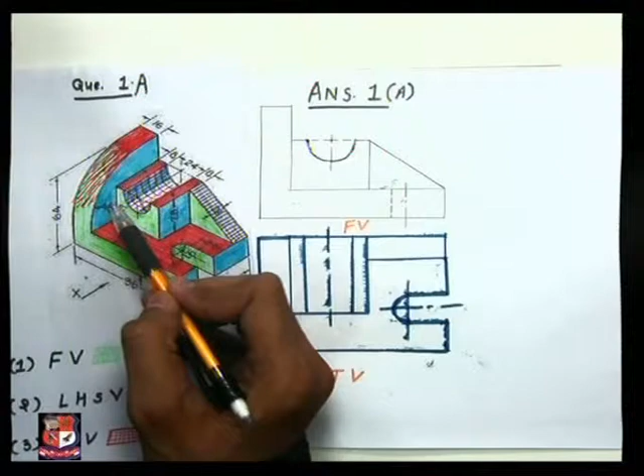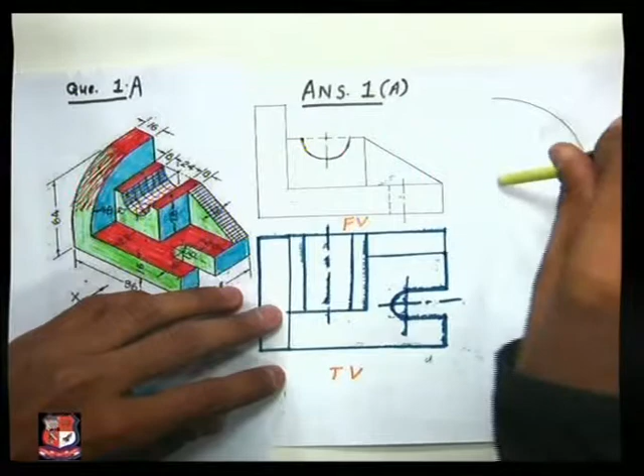Millimeter. So on the compass, put a radius of 48 millimeter like this, measure this 48 like this, and from here draw an arc of that radius. So it would appear like this. This is an arc of 48 millimeter distance like this, and these edges, this vertical edge, are fully visible. So draw those edges with the full line like this,

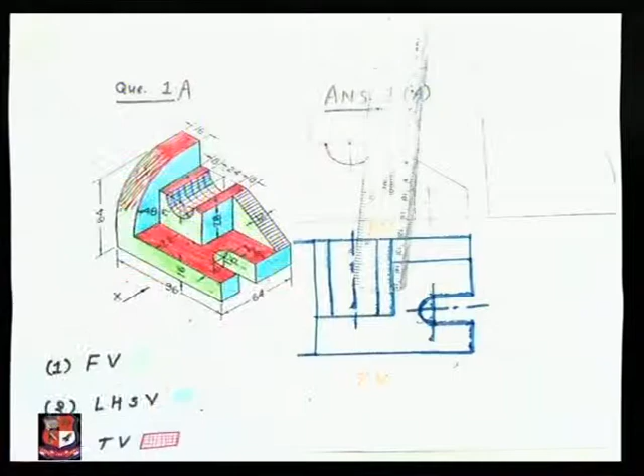and this is the bottom face of an object like this, and here it will be a straight line in left hand side view. Here also a straight line would be there. So this is the outline of its left hand side view. If you look from the left side, its outline would appear like this.

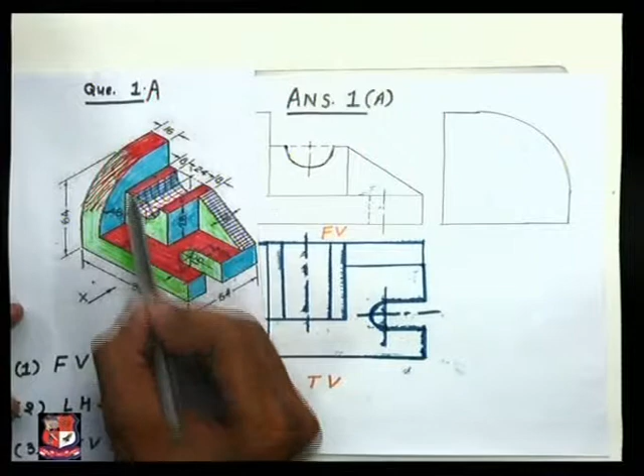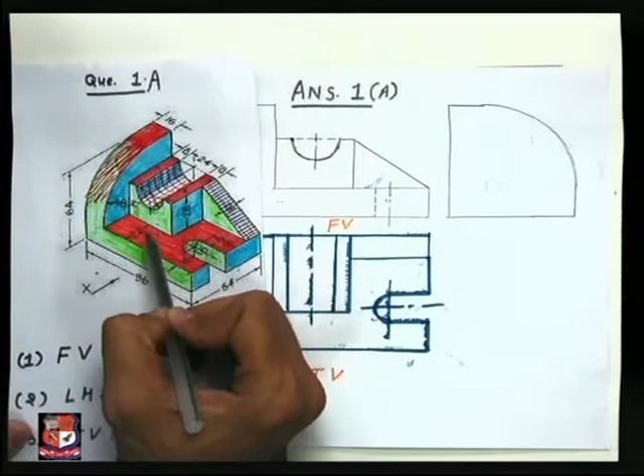Now these edges, this edge, this edge, this edge and this edge, all edges will not be visible in the left hand side view. Hence we have to draw all these edges with dotted line only, because they're not visible. So for that, let me start from here. This edge starts from here, ends up to here, and the total length is known to us, that is 64 minus 22. So draw a straight line from here, and of course it's a dotted line. So join them with a dotted line like this, because that edge is not visible in left hand side view

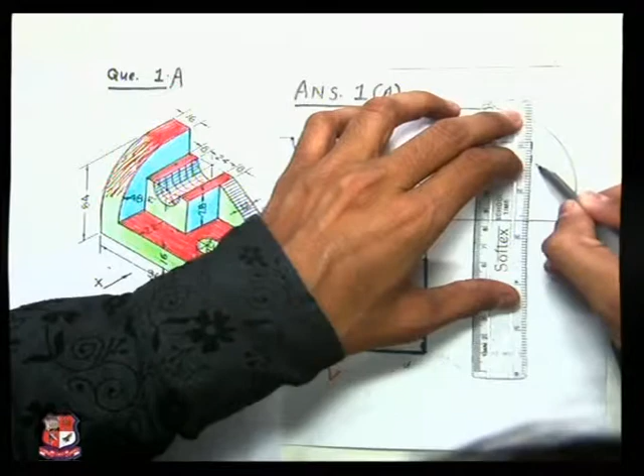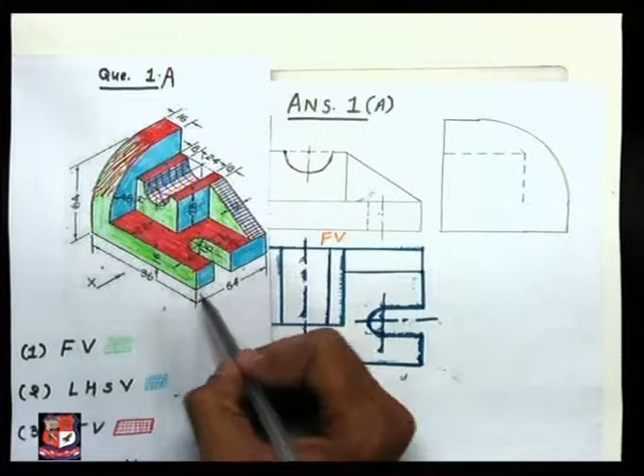up to here, and from here to here height is 28 millimeter. So draw up to 28 millimeter height with the dotted line like this. It's a dotted line. Now in left hand side view, this edge will also not be visible. This blue colored edge will be visible in the right hand side view, but in left hand side view it would not appear. So draw this rectangle with dotted line, and height is 16 millimeter. So this height would be 16 millimeter, and join with the dotted line like this. So this rectangle is drawn.

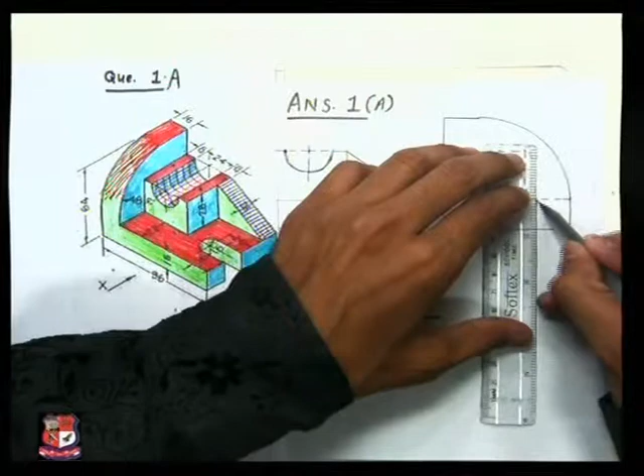Now think about this rectangle, these two edges. We know this distance is 16, this distance is 16. So from this end at a distance of 16 millimeter, draw a dotted line, and here again at a distance of 16 millimeter, draw another dotted line. So this is the side view. Now this strip is still not visible in the side view, but it is there. So we have to represent this strip with dotted line.

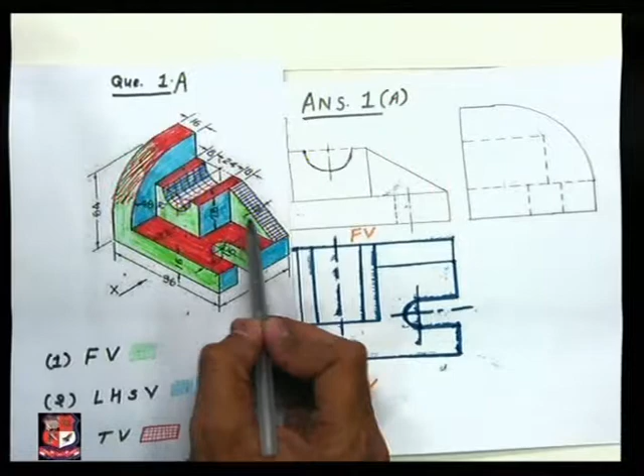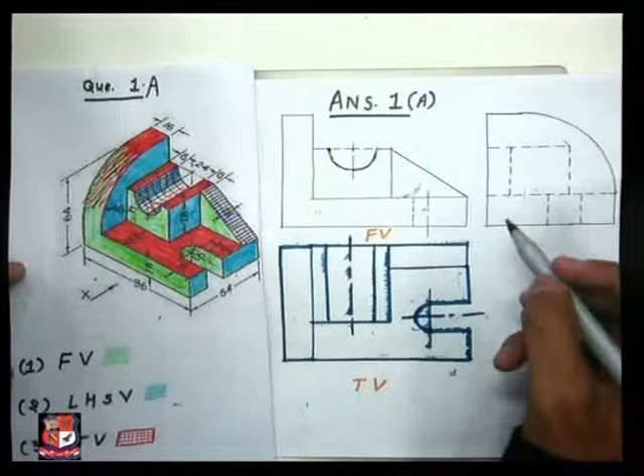Width of this strip is 12 millimeter. So from here at a distance of 12 millimeter, draw a dotted line like this, which starts from this edge and ends at this edge, because the strip starts from here and ends here. So this dotted line represents this strip of 12 millimeter width. So again, this is left hand side view. You can write here the name of the view, left hand side view, like this.

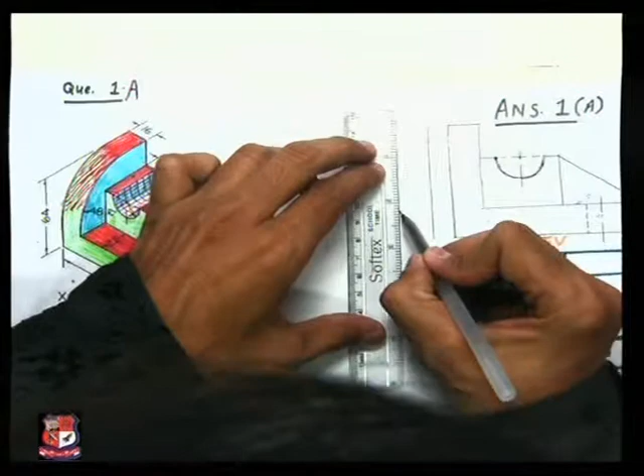Now the third view that we have to draw is the rear view. If you look from the rear side, the rear view would be exactly opposite to its front view. It would be the mirror image of the front view. So just draw the mirror image of this front view which we have drawn over here. It would appear like this. But in this case, some of the lines may be visible and some may not be visible. Lines which are visible here may not be visible in rear view, so they should be drawn with the dotted line. It depends upon the shape of the object.

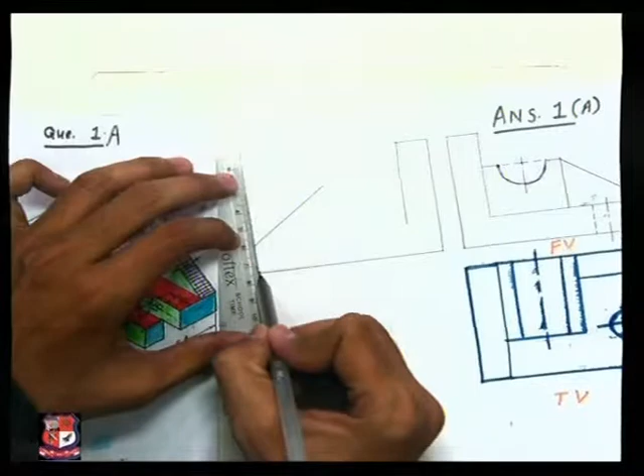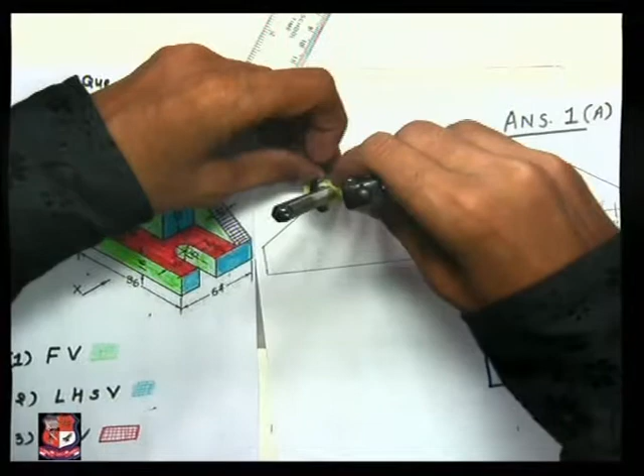Up till now, the outline would be alike in both cases, in front view and in rear view. It would appear like this. And here an arc is there, an arc with radius 12 millimeter or diameter 24 millimeter. Draw the arc with the help of the compass like this. So this arc would be visible like this.

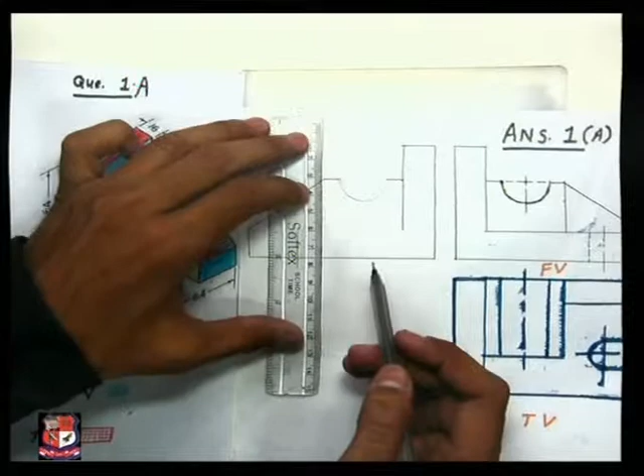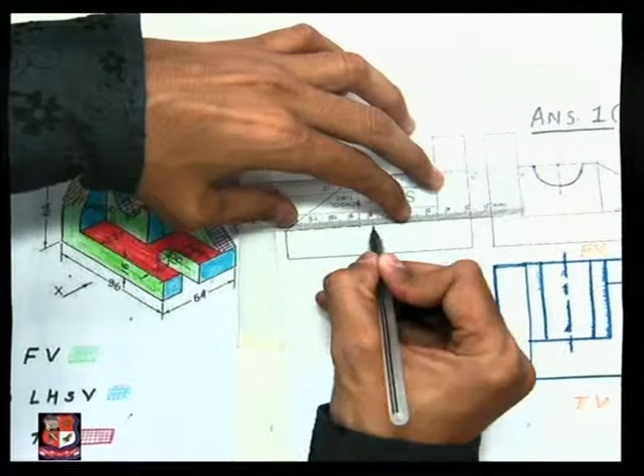Now think about this edge. This edge is there. It is not visible in rear view, so it should be represented by dotted lines like this. So you can see here in front view this edge is visible, but in the rear view this edge is not visible. Similarly, if you look from the rear side, this edge will also not be visible. Hence this line should also be drawn with dotted lines like this, because that edge is not visible in rear view.

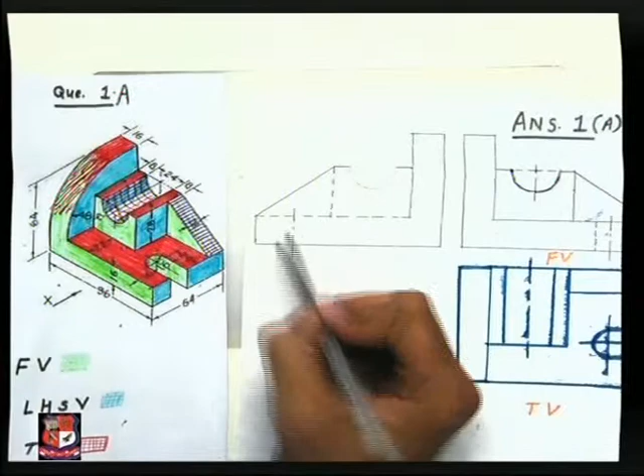Now think about this box, this edge and this center line. We know this center line is at a distance of 20 millimeter from here, so at a distance of 20 millimeter from this edge draw a center line, and from that center line at a distance of 8 millimeter draw dotted lines like this. So this view is the rear view of the given object.

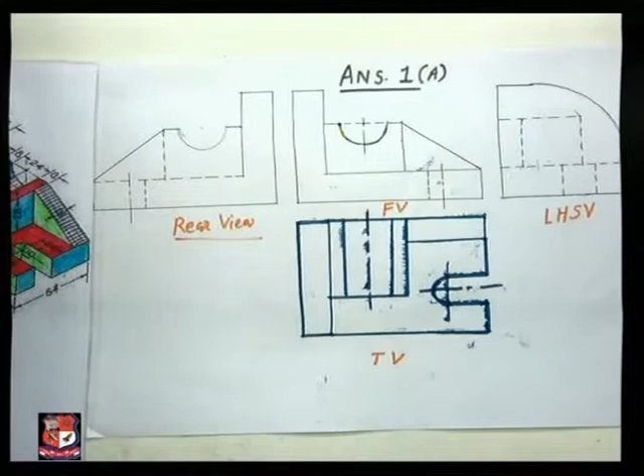And in the examination you have to insert the dimensions of all of this object. It should be drawn like this, as shown over here. This is drawn with better clarity.

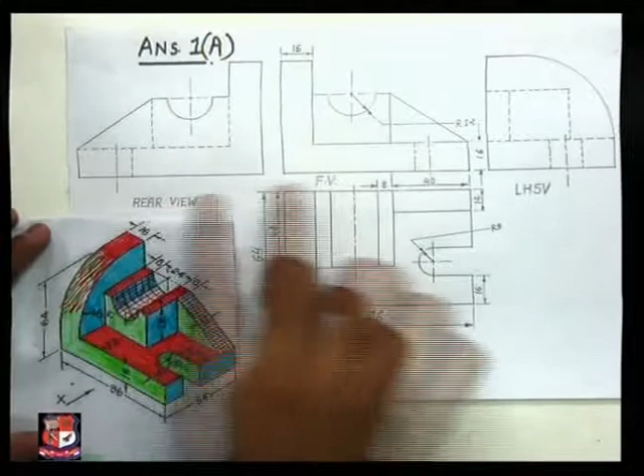This is an object, you can see here, this is an object, and for this object various views are there: rear view, front view, left hand side view and top view. This is the solution of this question. Here also you can see these are the views which are asked in the examination.

Answer number 1A, you should write like this with big letters, answer 1A, because students forget to write this. Front view as we have drawn, this is top view, left hand side view and rear view. Insert the necessary dimensions like this. This is 16 millimeter, this is radius 12, this arc is there, so the arc should be denoted by the radius parameter,

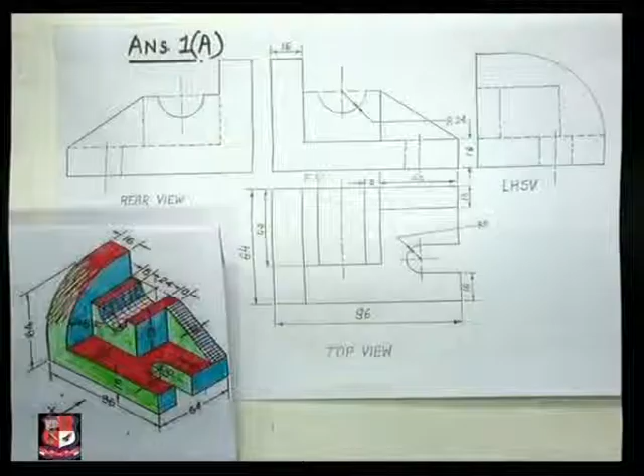not diameter. In the given diagram or in the given isometric view, here diameter is given, 24 is given, but in our case here we should write radius. We should not write this diameter 24, we should write like this, arrow and radius 12 millimeter, then 16 millimeter. Here also R8 is written, means radius is 8 millimeter.

We should not insert like this, from this edge to this edge distance is 16 millimeter. That should not be written in the drawing. That is against the actual law of drawing the objects. In left hand side view these are the dotted lines. In dotted lines also you should take care like this.

Whenever the dotted line turns like this, here a dot should not be there. This line should be joined. Here the end point should be joined with two dots like this. And here also a T mark should be there. Here also T should be there. So this is the dimension and solution of question number 1A, which is asked for 8 marks.

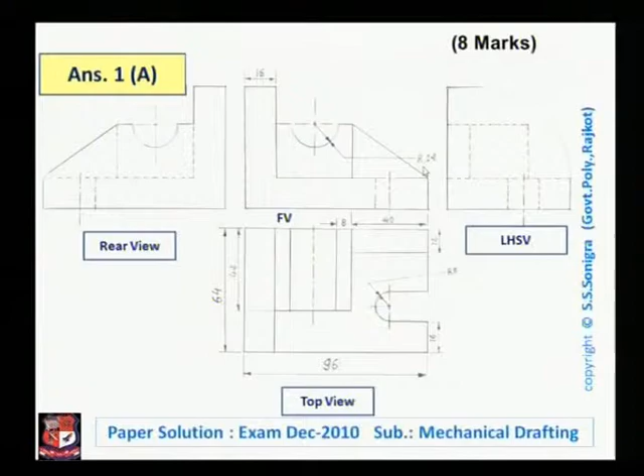Now we continue with question number 1B, which is asked for 5 marks. A square pyramid, base side 30 millimeter and axis 80 millimeter long, is lying on HP such that its base sides are equally inclined to vertical plane and one of its slant edges is perpendicular to horizontal plane. Draw its projections.

So here a square pyramid is given to us. As we know, in case of a square pyramid, its top view would be a square and its front view would be a triangle. And here it is given that its base sides are equally inclined to vertical plane. It means that its top view would be a square in such a way that all 4 edges or all 4 sides of the square make an equal angle, that is 45 degree, with XY line.

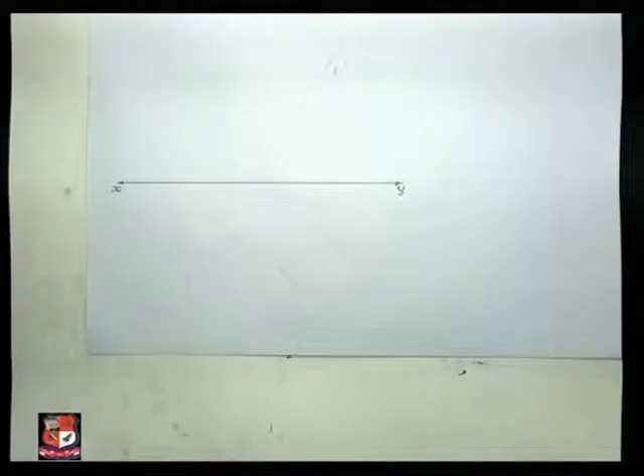So we have to draw its top view in such a way that the square makes an angle of 45 degree with XY line, and its front view would be a triangle with height 80 millimeter. So let me draw that object. It would appear like this. First draw an XY line as shown over here. After drawing this XY line, draw a square having side length 30 millimeter and all sides make equal angle with vertical plane, hence that angle is 45 degree.

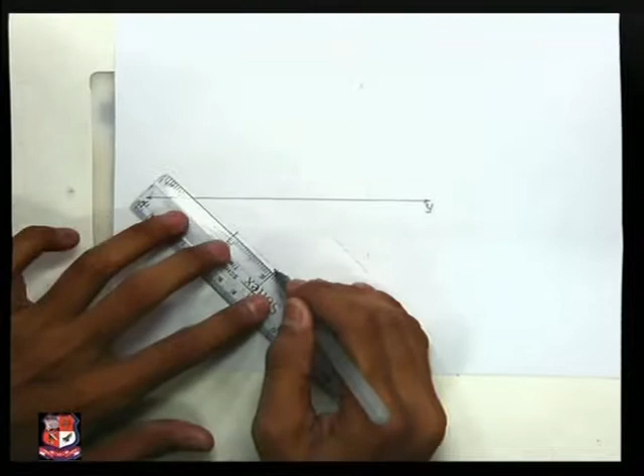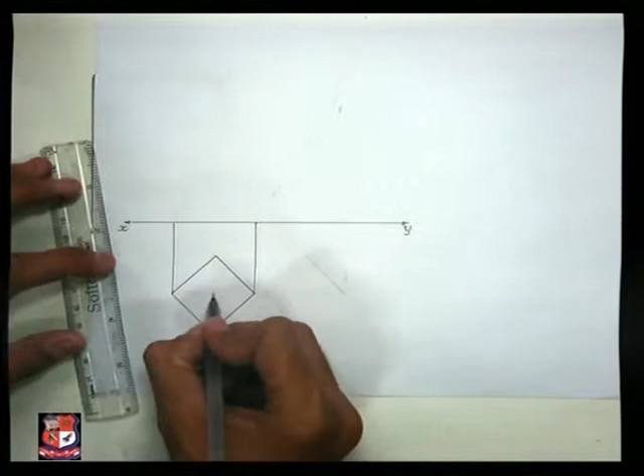So draw a square like this such that all these 4 sides are making an angle of 45 degree with XY line. This is given data. After that, take projections from this top view like this. Draw light vertical lines, that is projections up to XY line, and find out the apex point of this square. To find out the apex point, join its diagonals like this, from here to here, from here to here.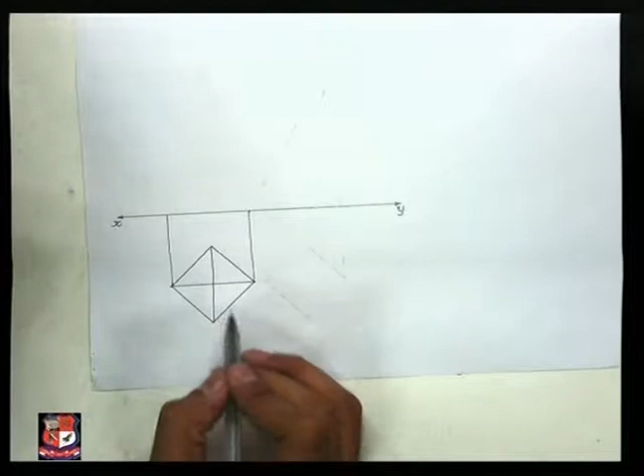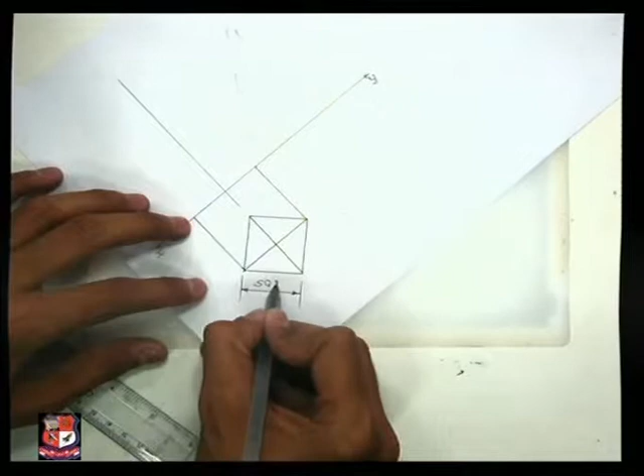So in top view it would appear like this. The top view of square pyramid would appear like this. Now to draw its front view, from this apex point draw a line like this. The side length is given to us, that is 30 millimeter. You can insert that dimension like this. This is 30 millimeter and it's a square. You can write like this, SQ30. It means that it's a square having side length 30 millimeter.

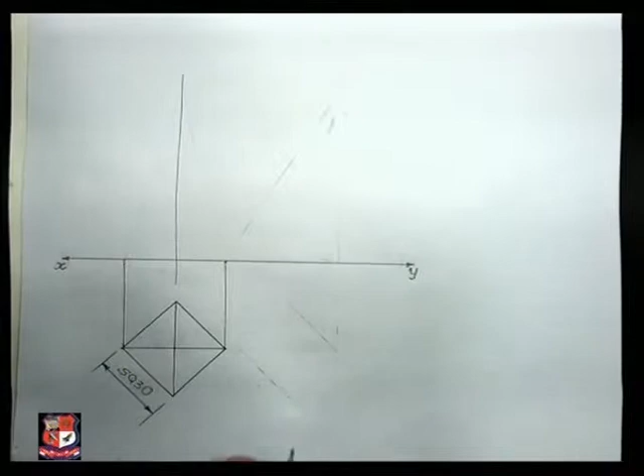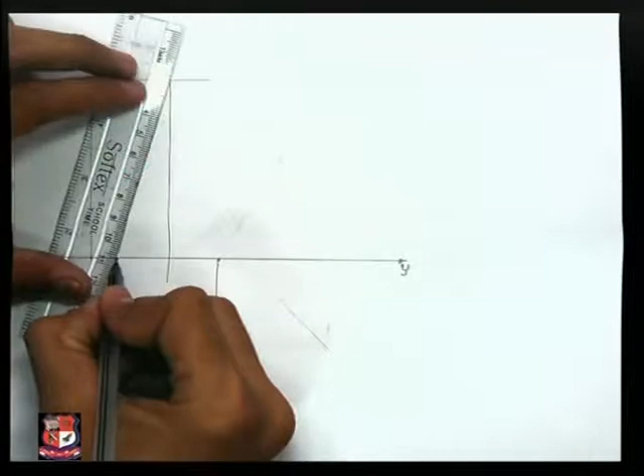So this is a square. Now height is given to us. Height is 80 millimeter. So from here, at a distance of 80 millimeter, mark a point somewhere here. 80 millimeter means from here to here. Mark a point, and from that point pick up over here, and from that point draw lines like this. So this is the front view of the given square pyramid.

This height is known to us, that is 80 millimeter. So insert that parameter over here. Height is 80 millimeter. Now after drawing this front view and top view, read this data. Till now we have drawn the first line: a square pyramid of base side 30 millimeter and axis 80 millimeter long is lying on HP, such that its base sides are equally inclined to vertical plane.

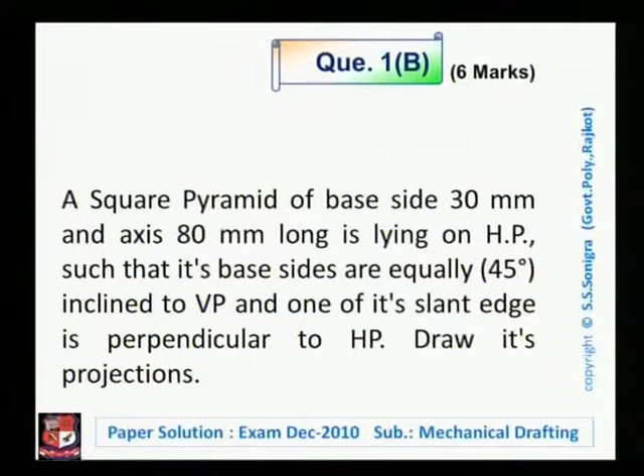Now next, one of its slant edges is perpendicular to horizontal plane. Now we have to draw this front view in such a way that one of its slant edges becomes perpendicular to horizontal plane. In front view the four slant edges are there, that is OA, OB, OC and OD.

So we have to tilt this front view, this triangle front view, in such a way that any one slant edge becomes perpendicular to XY line. So for that, let me draw like this.

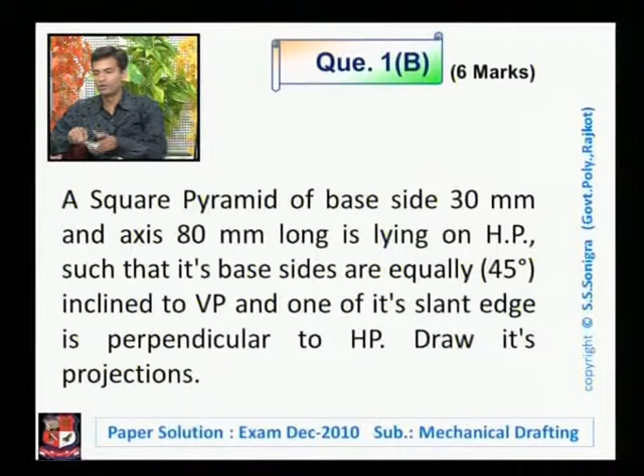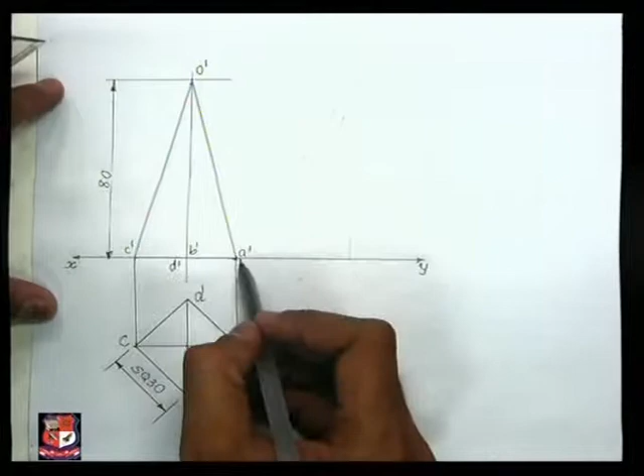Name the endpoints. So this is point A, this is point B, point C, point D, this is apex point O. Similarly here apex point is O dash, here is A dash, B dash, C dash and D dash in front view. Now this is a slant edge, O dash A dash is a slant edge, O dash B dash, O dash C dash and O dash D dash. Four slant edges are there. Suppose we can tilt any slant edge.

Suppose we pick up this slant edge O dash A dash, and we have to redraw this triangle in such a way that O dash A dash becomes perpendicular to XY line like this. So draw a vertical line like this. Measure this distance O dash to A dash, that is nearly 84, or you can pick up from compass also. Measure this distance like this, and from here cut an arc over here. So here is the point, that is O dash point, and here is point A dash. Both are on straight vertical line.

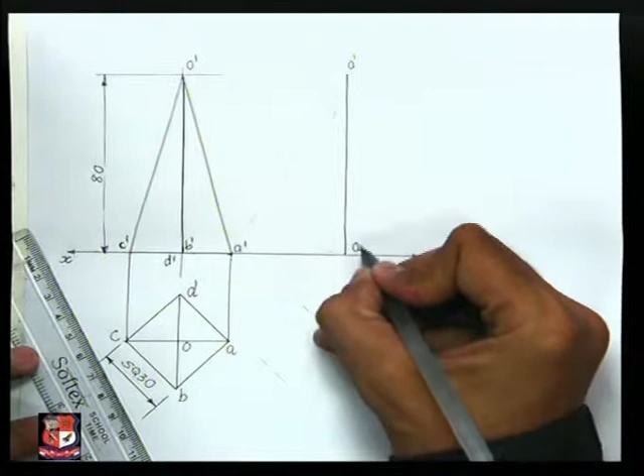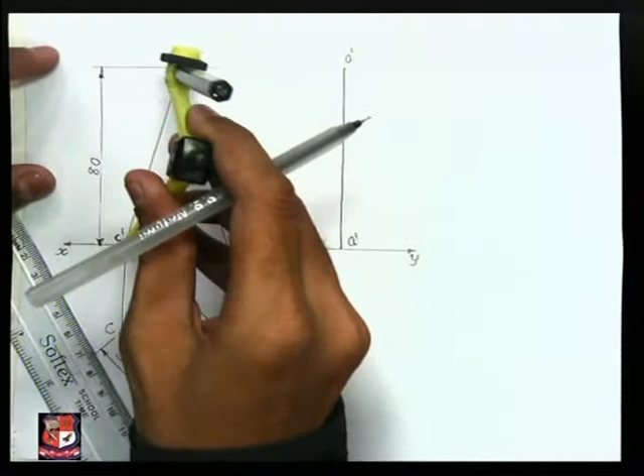Now to find out position of point C dash, what should we do? So for that, let me take this distance, A dash to C dash, as a radius. A dash center, draw an arc like this. And similarly, C dash to O dash as a radius, and O dash as a center, draw an arc like this, and both arcs will cut at one point, and this is point C dash. Join this C dash with A dash like this. Join this C dash with O dash like this.

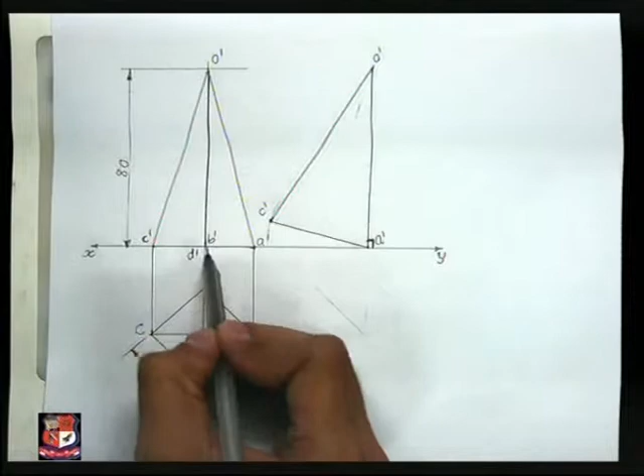So this is the front view of given square pyramid, in such a way that this slant edge O dash A dash is perpendicular to XY line or perpendicular to horizontal plane. This angle is 90 degree. And pick up this point D dash and B dash, measure this distance like this and cut it over here. So we have 2 points over here, B dash and D dash, and join this B dash and D dash with O dash with straight line, and here axis would be there. So draw an axis like this.

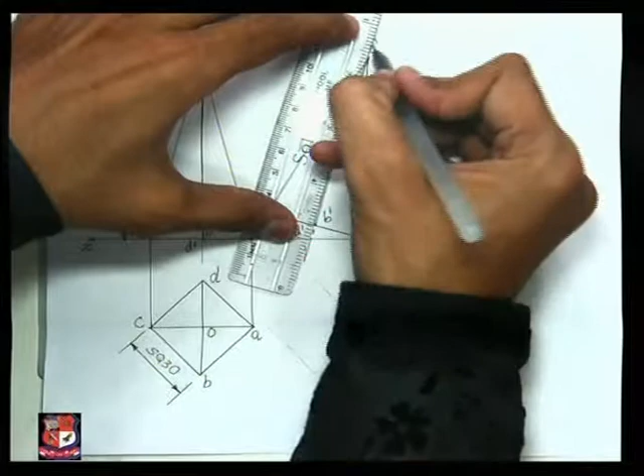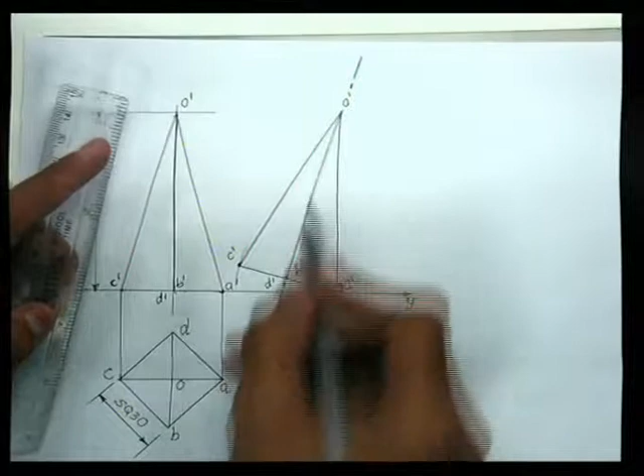Its axis also we should draw like this, because here also axis would be there, but there is an overlapping of axis line, that is center line and solid line. So whenever two lines are at the same place, we have to give priority to full lines. Hence center line would be hidden by this full line, and here center line would appear, which represents the axis of given solid.

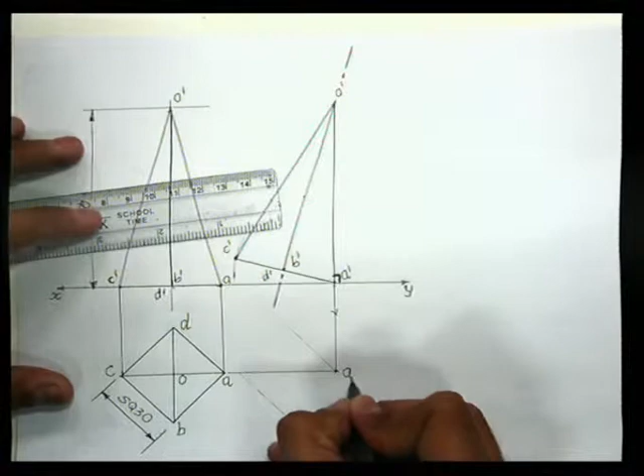Now next, to draw its top view, let me take projection from here: vertical line from point A dash and horizontal line from point A, both will cut over here, that is point A, or you can name A1. It is up to you what name to be given. Now to find out position of point B, from B dash draw vertical line like this and horizontal line from point B like this, and both will cut at one point. Name that point as point B1.

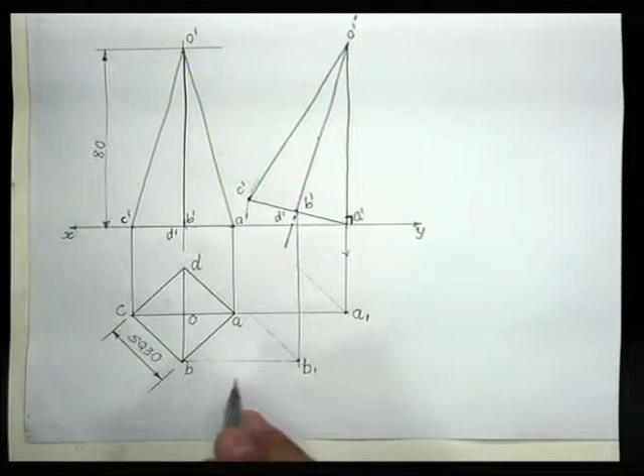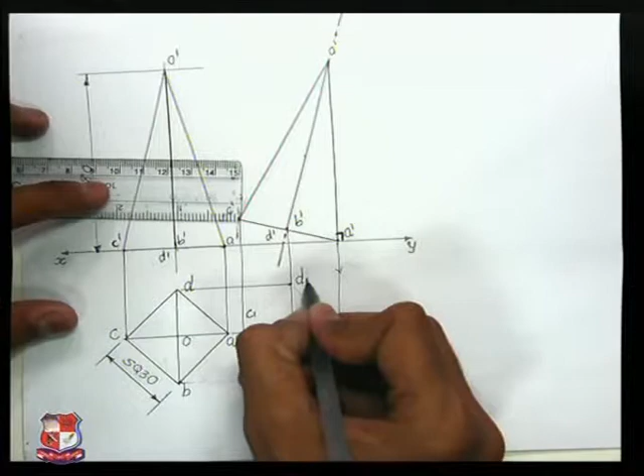Now point C, for that draw vertical line from point C dash like this, horizontal line from point C like this, and both will cut at one point. This is point C1. Similarly for D, vertical line from point D dash and horizontal line from point D, both will cut at one point. This is point D1. Join all these points with a straight line. It would appear like this. So this would be its top view.

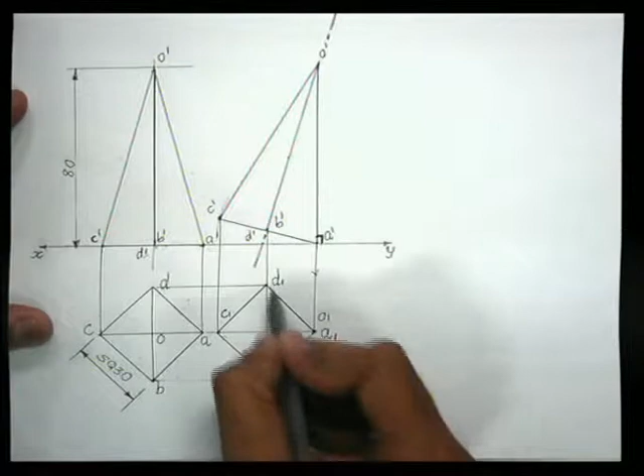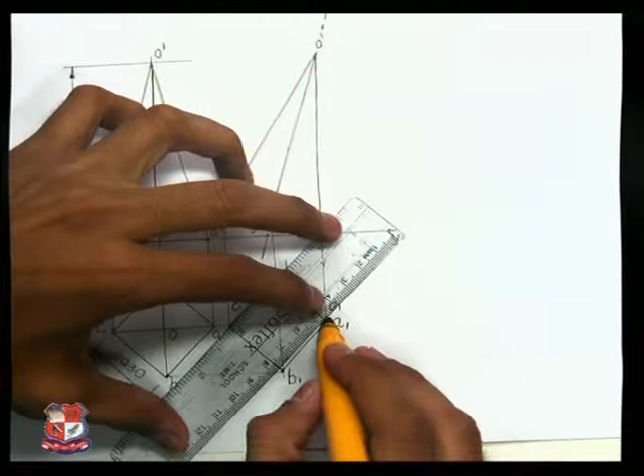But in this top view, the slant edges would not appear as it is like this. O dash A dash is here, O1 point is also there. Join O1 with D1, O1 with C1 and O1 with B1 with a full line. So it would appear like this: O1 with B1 like this, O1 with C1 like this, and O1 with D1 like this. And this AD and AB would appear. So this is its top view.

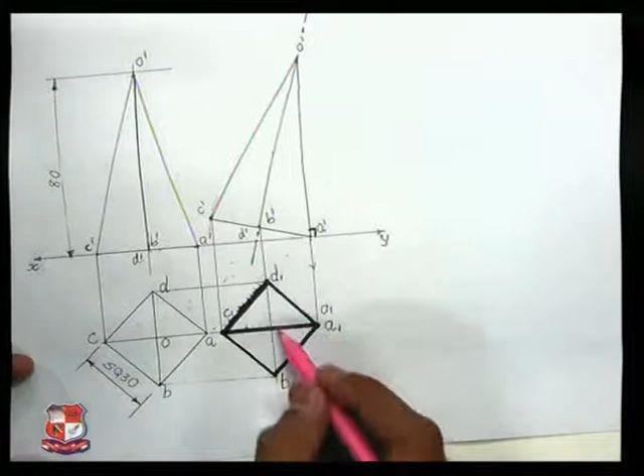In top view, this edge D1 B1, this line would not appear, so you have to trim it out, and this is the top view of given object. You can write the name of view like this. This is the top view. This is the final answer of given problem. Here no line would be there, you have to trim that line.

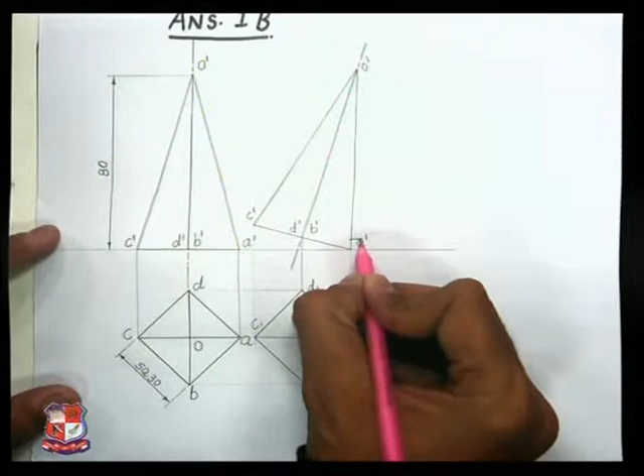This angle is not known to us, but this angle is known to us. You can write like this. This angle is 90 degree because it's given that one of the slant edges is perpendicular to horizontal plane. You can write